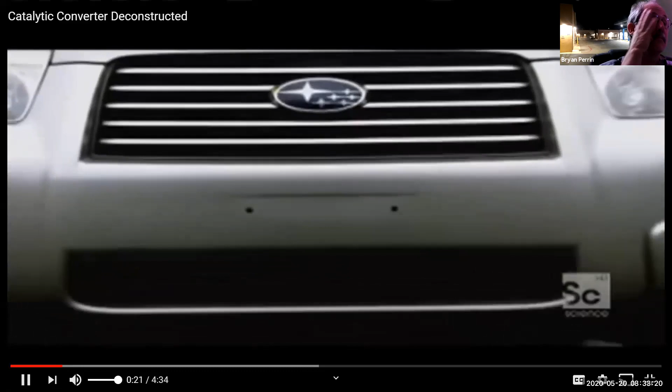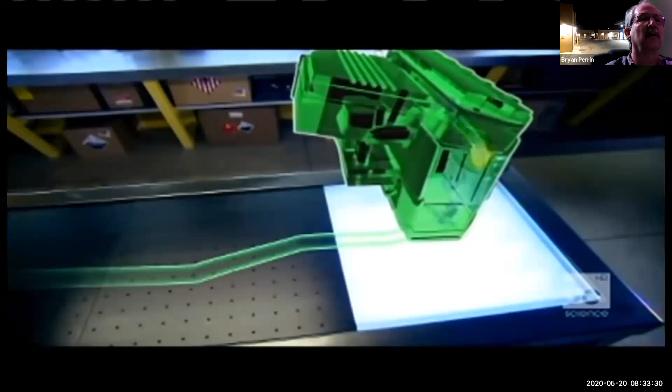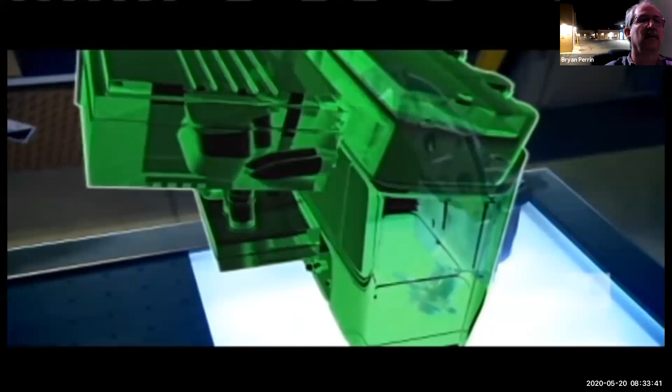Take it apart so you don't have to. A multitude of cars. In each one, a motor burns fuel, producing oxides, carbon monoxide, and unburnt fuel residue. Luckily, each car also has a catalytic converter, located under the hood, attached to the motor, right before the exhaust system. Gases produced by the motor go straight into the catalytic converter and come out the other side less than a tenth of a second later. The converter gets less than a tenth of a second to recombine toxic gas molecules and produce harmless substances like water vapor and nitrogen. How? To understand it, we've got to destroy it.

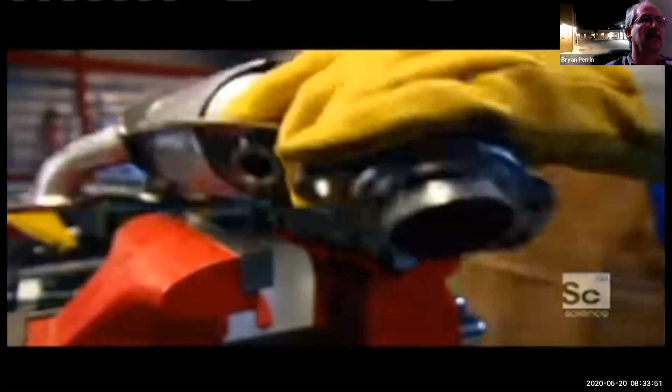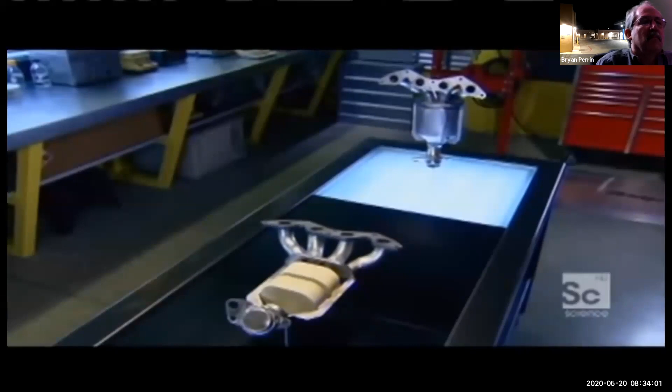The stainless steel housing contains two ceramic blocks. Each block is filled with thousands of...

Okay, those blocks are also called biscuits. And one of the things they're not showing you here is there's a blanket that wraps around the biscuits, that goes between the biscuits and the stainless steel shell of the catalytic converter, because these are made out of ceramic. So they're going to expand and contract at different rates than the stainless steel shell does. So when a converter rattles, it's because that blanket has been compromised, or this has been melted down, so it's undersized. That's also why when we replace catalytic converters, we actually have to perform a break-in procedure on them.

Where we actually get the catalytic converter hot, which causes that blanket material to do what's called a pop. And what it does is it pops to firmly hold the biscuit in place. Failure to do that will actually cause a catalytic converter to prematurely fail.

Not as much of a problem here on the West Coast where it's fairly warm, but back east or where it snows, an exhaust shop might put a catalytic converter on a car and just park it. Customer drives it home a couple miles, never really gets hot. By the time spring comes around and it starts getting hot, it's too late - the thing's already undersized, it's been moving around, the converter's junk. So there is actually a break-in procedure when you replace a cat, but I want to point those out.

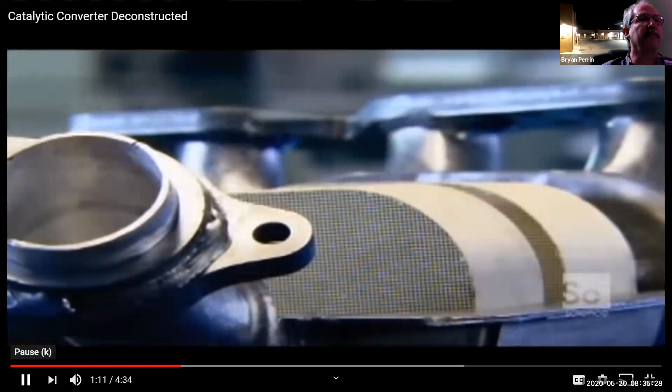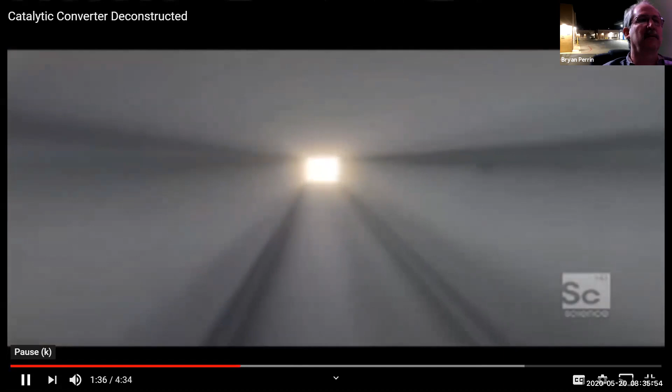...of microducts. Their sides are coated with precious metals - platinum and rhodium in the first block, platinum and palladium in the second block. Metals that can cost more than $100,000 a pound, but they're worth every penny. Together, they have the extraordinary property of causing toxic gases to react and then recombine, producing gases that are harmless to your health, all that without altering themselves or rusting.

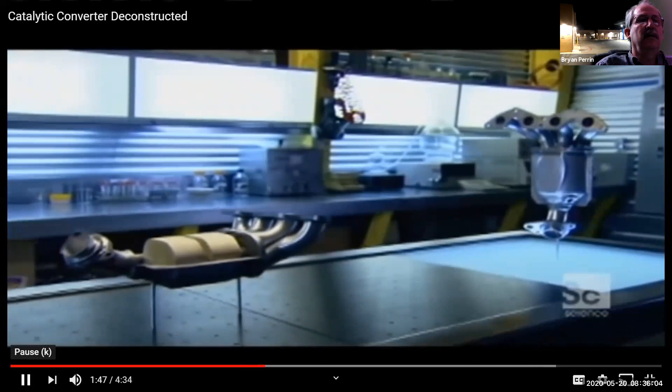Precious. The trick is to maximize the contact zone between gas and metals. That's why there are so many microducts, almost 400 per square inch. Their combined surface area matches that of a football field - a laboratory as big as a football field, but folded onto itself in order to remain small.

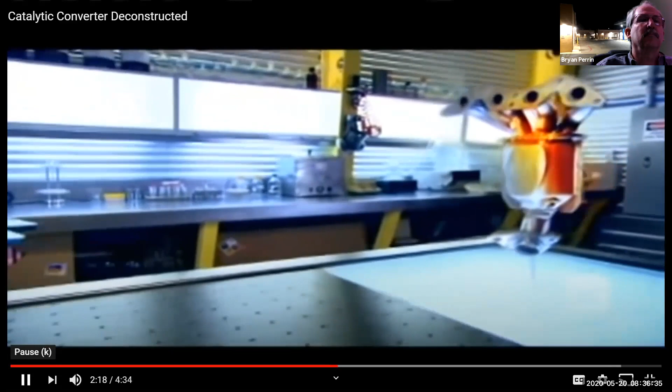The transformation of gas from toxic to non-toxic happens most efficiently when the catalytic converter is hot. Very hot - 1,300 degrees Fahrenheit. It's the toxic gases themselves that heat up the catalytic converter.

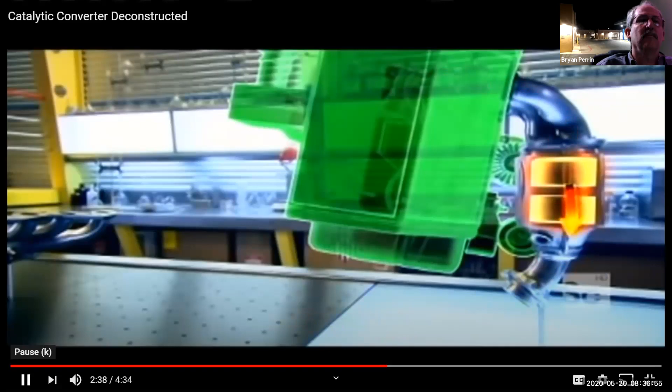Exhaust gases exit the motor at temperatures as high as 900 degrees Fahrenheit. The chemical reactions inside the catalytic converter also generate heat, transforming the converter into a super efficient furnace designed to break down and reform gas molecules. Let's take a closer look at these mysterious transformations.

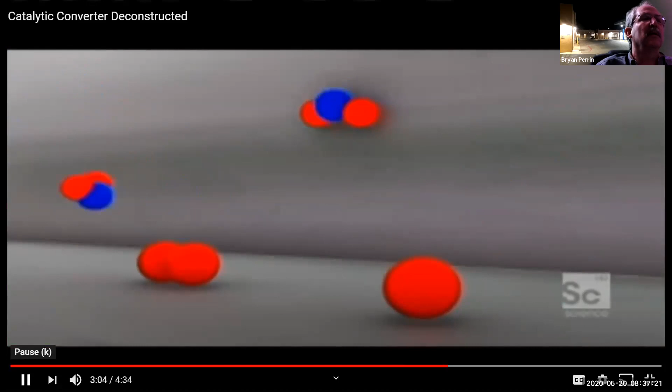The nitrogen oxide and carbon monoxide molecules, along with molecules of unburnt fuel residue, enter the catalytic converter. They're swallowed up by thousands of microducts. As they reach the platinum and rhodium in the first block, nitrogen oxide molecules are the first to react. These metals break down the molecules by withholding one of their atoms. The freed atoms stick to each other and recombine. The result: nitrogen oxide molecules become oxygen and nitrogen, which already make up 99% of the air that we breathe.

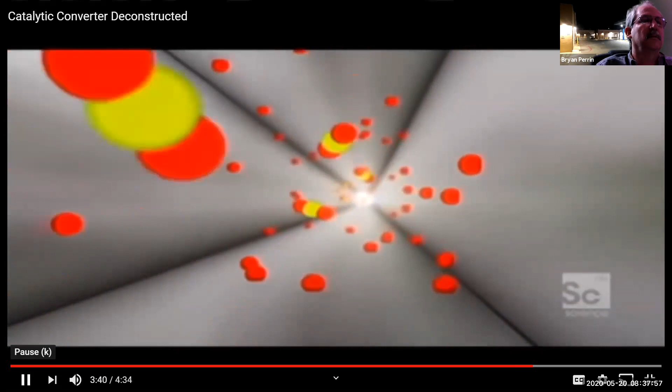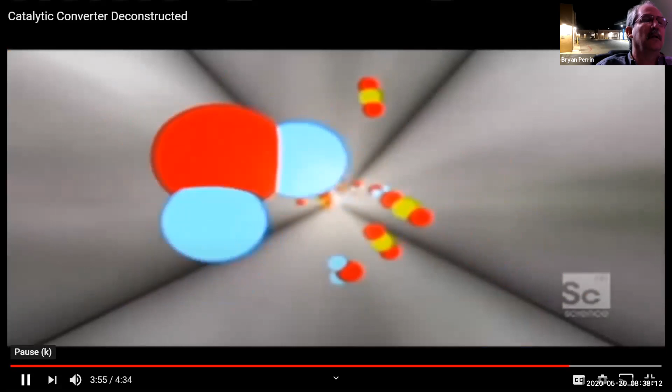The gas molecules now head into the second block, where the microducts are coated in platinum and palladium. These precious metals withhold oxygen. The intense heat here forces the carbon monoxide molecules to combine with the oxygen. The result: carbon dioxide, the same gas that creates bubbles in soft drinks. Now for the molecules of unburnt fuel residue: at these extreme temperatures, their encounter with the oxygen forces them to recombine. The result: more carbon dioxide and water. All that in less than 1/10 of a second.

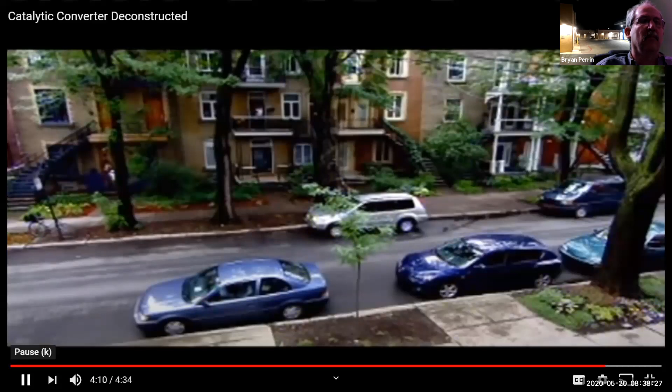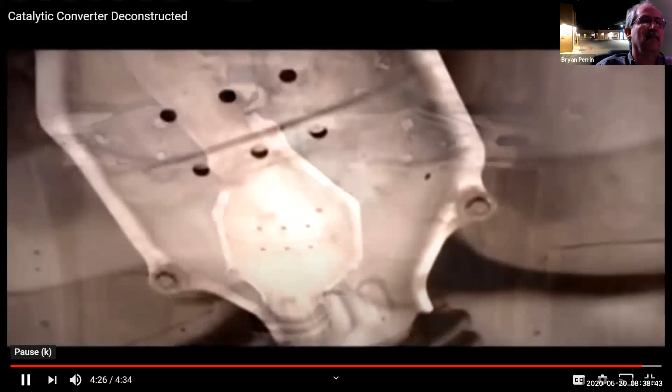In theory, the catalytic converter can eliminate 99% of a motor's toxic gases. In reality, it's inefficient as long as it's not hot. A car has to travel about 6 miles before the catalytic converter reaches its ideal operating temperature - that's 6 miles spewing untreated gases. In spite of the catalytic converter's best efforts, the car remains a source of pollution. But thanks to this miniature laboratory, it emits 5 times less pollution. That's still pretty impressive.

Okay, what did you guys think of that? Super cool, very informative. Yeah, I like that. I like a lot of the stuff in it, and a lot of it is more in the 90%.

You mean of being accurate? You mean any people with gas cars, they need to get smogged every 6 years? What about every 6 years? You gotta get your car smogged. Not every 6 years - once it's more than 8 years old, if it's powered by gasoline, it's every other year. Or every other year, like the 90s? Biannual inspection, so we do it every other year for the purpose of smog. We used to have a 6-year rolling exemption, so if I had a brand new car and I hadn't sold it, I didn't have to smog it for the first 6 years. Now it's the first 8 years. If I sell it, and it's less than 4 years old, I don't have to have it smogged, but if it's more than 4 years old and I sell it, I have to get it smogged. But I thought it wants you to smog every 3 years, isn't it? I thought the DMV wants you to get your car smogged every 3 years if it's like 10 years older. It's every other year. Every other year? Biannual. So that means if it's like my 2012 has to be smogged in 2020, 2022, 2024, and so on. My 05 has to be smogged in 17, 19, 21, and so on. So my 3 cars that are odd years - my 87, my 95, and my 05 - all have to be smogged the same year. And then my Camry is a 12, so it gets smogged in an even year.

So one big thing they're missing in the catalytic converter video is cerium. Cerium is a rare earth element that is used to store and release oxygen. Normally we're using about Ce5, Ce6 - there's 5 or 6 cerium atoms stuck together. So we use cerium to store and release oxygen. The significance of that is twofold: first, cerium is the material that melts at the lowest temperature - it melts at 1462 degrees - so it's the first material in the catalytic converter to go away.

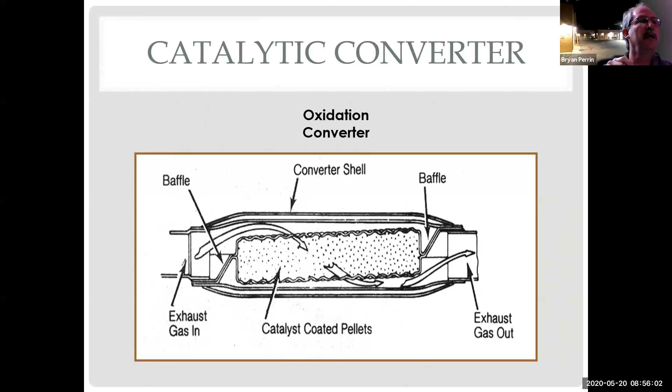So this is a traditional oxidation converter. These were pellet types, and they were restrictive. The plug you see at the bottom right was originally designed so you could take it off, pull the plug out, and put more pellets in. No one ever did it, but all the GM dealers got the factory tool to do it with, along with a bag of pellets. But these are restrictive because it's much more like filtering through sand—I'm pushing the exhaust through this pile of pellets, and the air has to find its way to weave through. These were very efficient because something couldn't go directly through and never touch anything, so it had a good catalytic reaction.

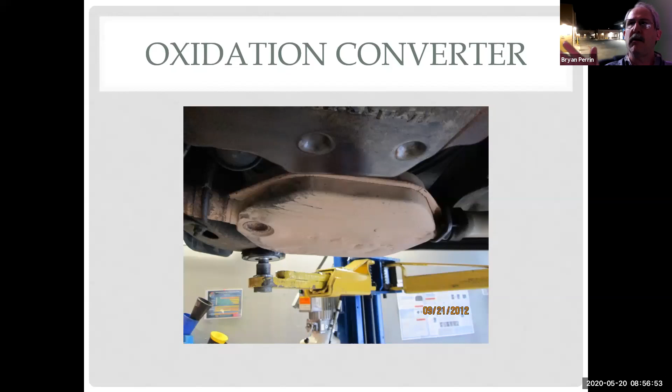Now, these catalytic converters only have platinum and palladium in them because all they do is oxidize. So they do nothing for NOx—they strictly oxidize HC and CO. The internal temperature of a catalytic converter, in order to work properly, is 600 degrees. Once it's hit 600 degrees, it can start working.

Wait, isn't it 1200 to be efficient? No, 600 is where they start working. Below 600 they're pretty inefficient. The hotter the catalytic converter gets, the more efficient it becomes.

But in the video he said 1300. He said the gases from the engine by itself are 900 Fahrenheit, and then the chemical reaction heats it up to 1300. Let's think about this for a second. I know the article also says 1300, so you put what the article says in it.

But at 1300 degrees—and that was true on oxidation cats because we'd pump air into them and get them really, really hot, hot enough that you weren't allowed to idle the car more than 5 minutes or the carpet would catch on fire.

But would we design something to work at 1300 degrees normally, and at 1462 degrees, only 10% more, we're going to do catastrophic damage and have to throw the part away? No, that's not smart. It just doesn't pass the smell test.

I do know the internal function of the cat from all the research stuff I've read on cats. They need 600 degrees Fahrenheit to start working. As they oxidize, they generate more heat.

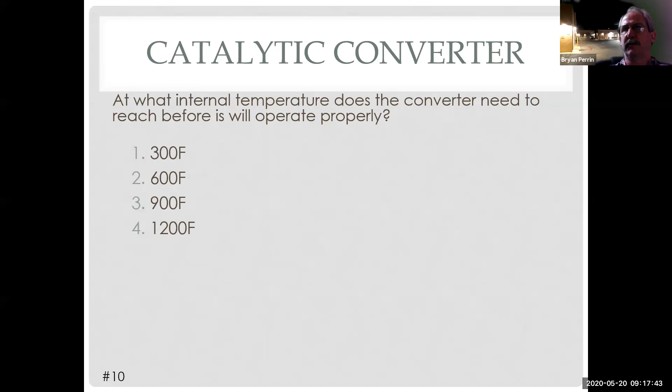Apparently the video, and that was the Science Channel, I mean that's a big budget production. They didn't get the memo.

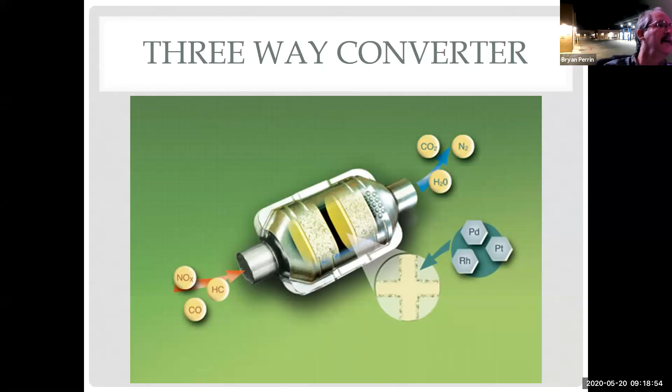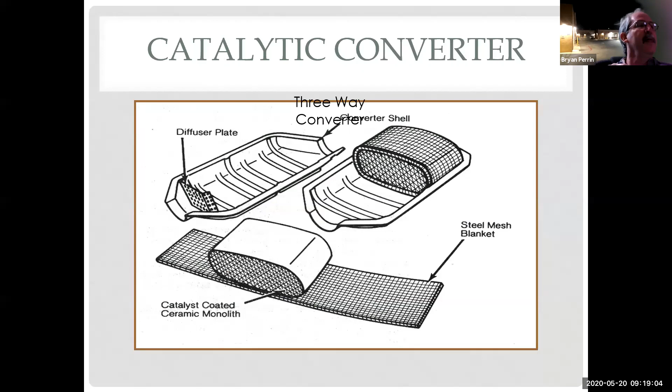So this is a nice picture. I put this in here because it shows the blanket that goes around the biscuit, or ceramic monolith is its technical term. And that's what pops when we break in the CAT.

What component is required to be present on a vehicle for a 3-way converter to operate properly? And the correct answer is oxygen sensor. The reason why is because I have to be able to go rich, I have to be able to go lean, I have to be able to go rich, and I have to do that at a certain frequency in order for my catalytic converter to work. Rich, I can reduce NOx. Lean, I can oxidize HC and CO. Rich, I can reduce NOx. Lean, I can oxidize HC and CO.

And again, if that gas is going through the CAT in 100 milliseconds, I really need that O2 sensor to be switching at least every 100 milliseconds or so, right? So that I'm not overwhelming the cerium.

What the cerium does is allow it to hold oxygen when I'm lean and release oxygen when I'm rich. So the cerium is what allows, when the car is rich, I can still oxidize because the cerium is going to release oxygen. When I come down lean, I can still reduce some NOx because the cerium is going to grab oxygen. The chemical reaction with cerium to oxygen is much faster than the chemical reaction with rhodium to oxygen. However, rhodium is much stronger than cerium, so rhodium is strong enough to break the bond with the nitrogen atom and separate oxygen and nitrogen. Cerium's not, cerium's just out there grabbing the free stuff. But because the reaction with cerium is so much faster, it's able to grab that free oxygen before big dumb rhodium can grab it, which leaves rhodium the only choice to get its oxygen from the nitrogen atom. And that's why if a car's running lean, it can reduce NOx.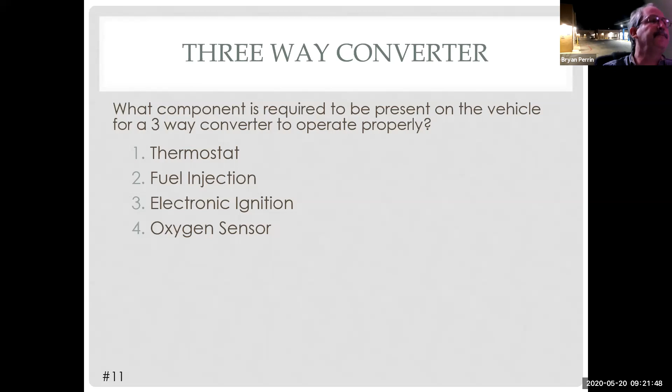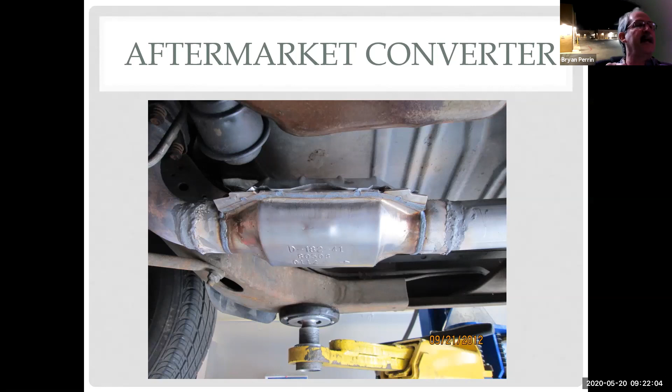So here's an aftermarket converter. When I'm doing a visual inspection for a smog check, I would see this aftermarket converter underneath, and I would have to go in and get the numbers off that converter and ID it. The soldering - yeah, here's another one. See how nice and easy that is to read?

Why do we study the composition inside? Because if I don't understand the composition inside, I can't understand how to test it and how to replace it properly. So the chemistry inside the cat is highly important. If you notice, I don't spend a lot of time inside a lot of things.

But the only way to test is like the result of the smog on the other side, right? No, absolutely not. There's several different ways I can test a cat. On an OBD2 vehicle, I'm not going to measure the smog coming out the other side at all because it's not going to tell me. If I drilled holes in front of it and behind it, it still wouldn't tell me accurately. That's called an invasive test, and it's horrible and doesn't work well.

So on an OBD2 vehicle, I can test it with the O2 sensors - the quantity of oxygen there on the other side. Well, yes and no, it depends on how the catalytic converter is being tested. There's two different ways we test cats. One is what's called switch ratio testing, where I monitor the front O2 sensor and I monitor the rear O2 sensor. If the front O2 sensor is doing this and the rear one is doing this, we're assuming that we have some cat function.

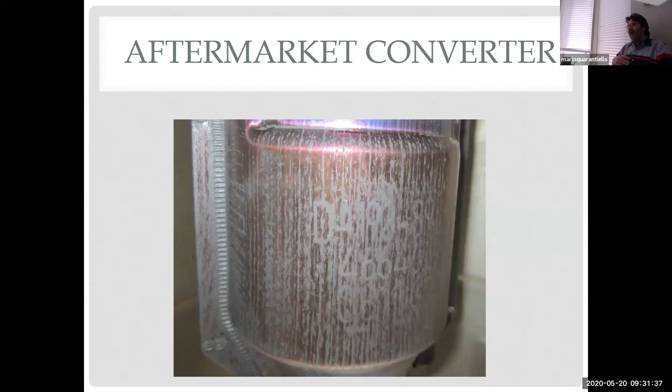So is this a factory or aftermarket cat? Aftermarket. Aftermarket, which means what? I need to go get numbers on it.

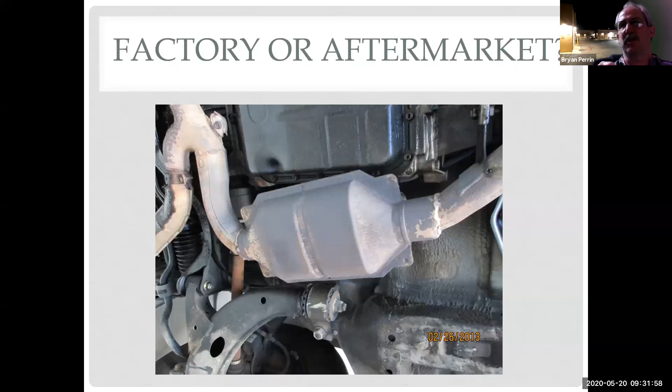Here is an aftermarket cat, we can see the numbers on it. I can see the executive order number and the part number, and I'd have to look at the next thing to see the manufacture date.

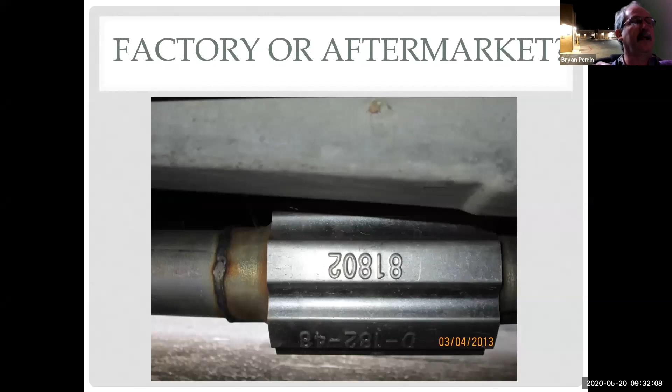On these early systems with air injection going into the cat, it was real easy for these catalytic converters to overheat. We were told not to let these cars idle for more than about 5 minutes. At least once a month, we'd get a car pull in off the freeway with the carpet on fire because the catalytic converter overheated, because the car would be running rich, and with all that air going in, now we have a blast furnace. It would overheat, get past the heat shield, and cause the carpet to catch fire.

We used to get about once a month in the service station cars pulling in off the freeway, literally with the carpet smoldering or small flames. Very, very common back in the day. This is also where, if you park on grass, you're going to start a fire. It goes back to this system.

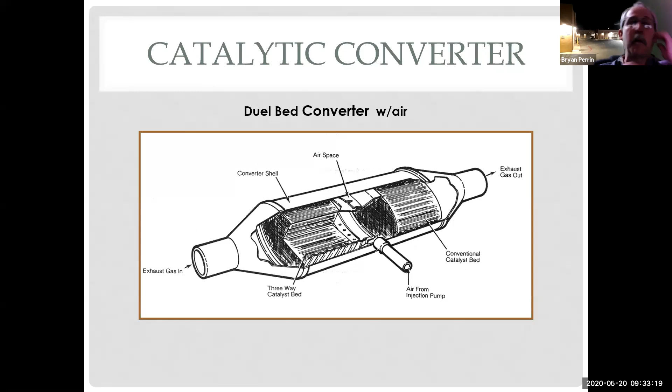What emission does an oxidation converter use to help control? NOx? No, it oxidizes everything except NOx. What do I oxidize? CO and hydrocarbons. Hydrocarbons and carbon monoxide, that's what we oxidize. So this is what we have on the oxidation side.

Oh, I'm sorry, I misplaced my chat. It was hiding behind all your pictures. Looks like I got the video. Okay, I hardly hear the video. I think I got that.

Smog, okay, I just want to make sure. What's the difference between California and federal cat? Great question. The biggest issue is how's the cat certified. That's it, how did they certify it when they got it done?

So a California cat may have a different load to it. In aftermarket, California converters have a higher load, more precious metal in them. Also, they've had to go through the testing process with the California Air Resources Board. Federal catalytic converters, we just made a cat, here's the part number, please buy. But we cannot install them in California if they're not California approved, correct? Yep.

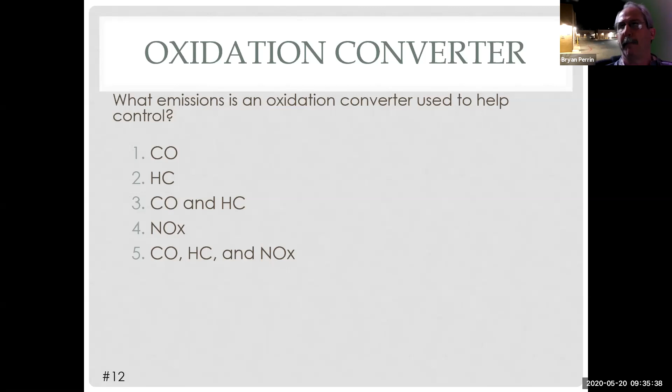So here's a warm-up three-way cat. Keep in mind, this is still a three-way cat. It's called a warm-up three-way cat because it's mounted right against the engine or right against the exhaust manifold.

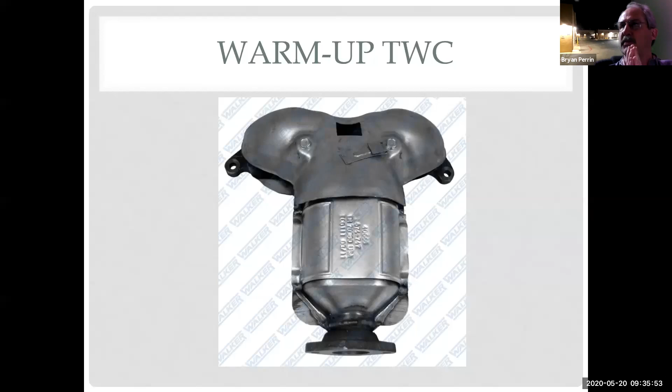What emissions is a three-way converter used to help control? CO, HC, and NOx, all of them. Got it, all the above. So the two things you need to remember: oxidation, we oxidize HC and CO, we turn it into H2O and CO2, we're adding oxygen. Three-way cat does everything. Reduction cat is NOx, we reduce NOx, we break it into oxygen and nitrogen. Another thing is we use rhodium to reduce NOx. R&R, rhodium reduces. Platinum and palladium are used to oxidize HC and CO.

So that's kind of how I remembered the elements and what's going on inside there.

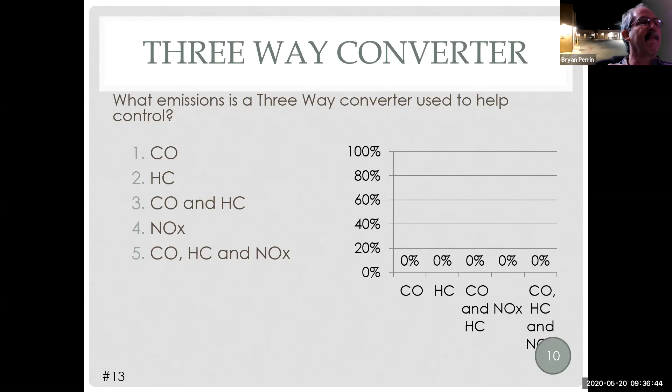So here's a heat shield right here. Kind of shows the location. If we're replacing a catalytic converter, I have to install the converter in the same place. I can't move the converter, I can't add pipes, I can't move O2 sensors. There's a lot of limits on that, and I should put that into our resources.

That's on the CARB website, and I should move that over into our shell. I didn't think about that, and I'm gonna. I have the heat shield, the protection for the heat. The heat shield's protection from heat. We see we have it underneath to kind of protect the grass and things like that, and we have them underneath the carpet, underneath the floorboard to help keep heat out of the driver's compartment.

And we do that for a couple reasons. One is if I put a lot of heat in the driver compartment, that means I'm gonna have to run the air conditioning more in order to cool the car. So now I'm wasting energy. So the heat shield, we're using it to try to save energy a little bit. We're also using it for protection. So multiple reasons.

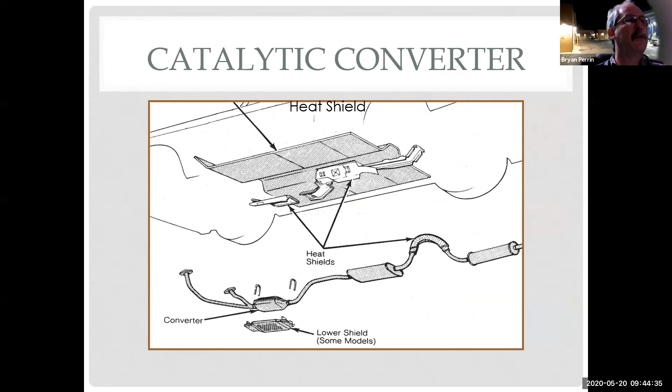Pretty interesting. Okay, so now let's look at diesel emissions a little bit. I want to finish this up today. Oh, it's already 10. Come on. All right.

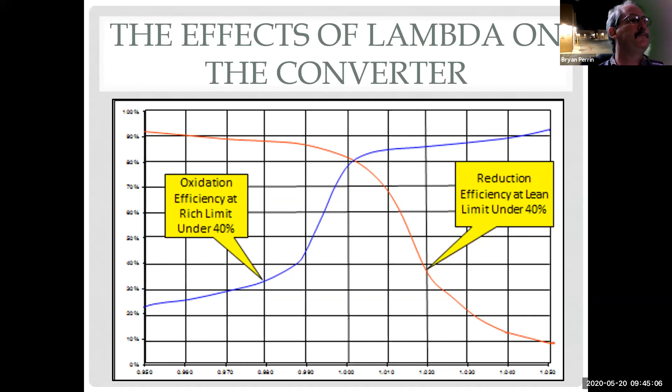Okay, so diesel emissions. We could spend a week on diesel emissions, but I want to give you at least an overview here and why we have them.

I like this slide because it shows the big regulation years: 1994, 98, 2002, 2007, 2010. This is when the regulations went into effect, telling the diesel industry to clean up its act. What's interesting is the regulations for 2010 were made before 1998—the industry was told how clean it needed to be and how long it had to get there, but there was no technology available at that time to get a diesel to run that clean.

We traditionally do this with vehicles: we legislate standards where the technology isn't yet available, then task manufacturers to develop the technology to meet those standards. That's also why some of that technology doesn't always work so good the first year or two, because it's brand new—it's just been invented.

The other interesting thing is that all these emissions are measured per horsepower. So two things have happened with diesels from '94 to 2010, and we see it continue today: diesels, besides running cleaner, produce a lot more horsepower. They produce more horsepower because if I make more horsepower, I don't have to be as clean. Are you following the logic? If I make 100 horsepower, I'm only allowed to put out so much emissions. But if I make 200 horsepower, I can put out twice as much and still be legal. Kind of a neat trick, isn't it?

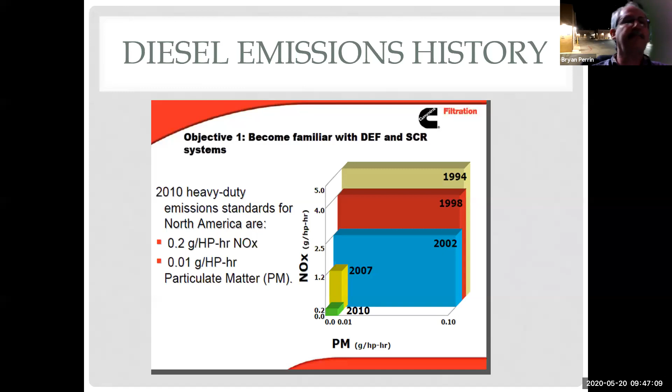So for 2007 and older, we see the diesel oxidation converter and diesel particulate filter. From 2010 to 2013, we saw the selective catalytic reduction come in, the SCR, which uses AdBlue or DEF fluid—diesel exhaust fluid—or AdBlue if I'm working on a European car.

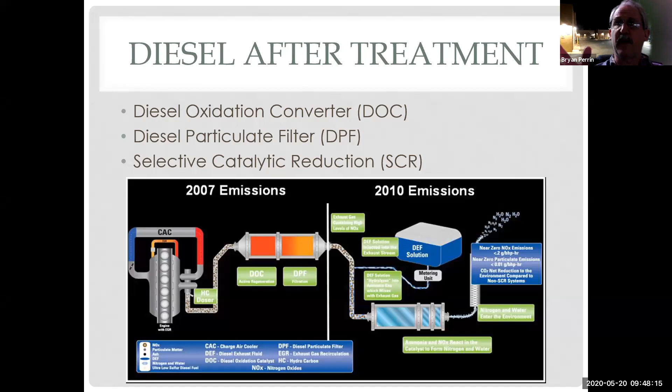We actually use the AdBlue as the catalyst in this process. The SCR is essentially a frying pan, and we add the DEF solution as our catalyst. That's why customers have to buy the DEF fluid and put it in. Inside our SCR, all it has is steel and copper—sounds like a Revereware frying pan to me. It should never wear out because it's just a frying pan.

Diesel exhaust systems can look a lot different. I do have oxygen sensors here, but look at my diesel oxidation converter up front. Then I have a NOx storage converter, and an H2S converter, which is for sulfur. What is that? 2 hydrogens, so it's sulfur dihydride, I think, or sulfur—been a long time since I was in chemistry, but you get the idea. The S means sulfur. You had a question, Humberto?

Yes, I do—who is watching the AdBlue level in this system? Who is watching which levels, the emission levels or the AdBlue? Let me get to the SCR and we'll talk about that. Okay.

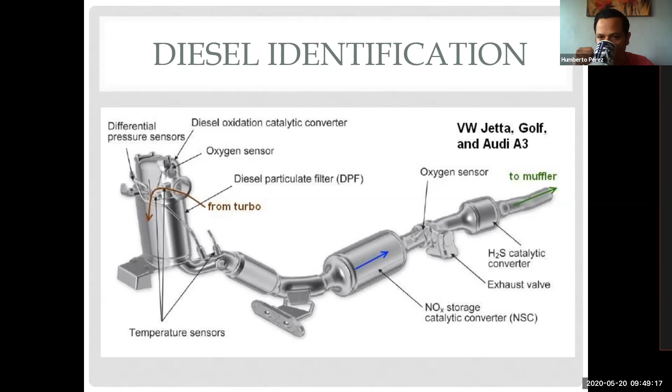And there's a picture here out of ALLDATA that shows me where all the pieces are. So if I've never smogged one of these before, you can see the underhood label. It's all Greek to me. Let me go get a picture. I'm not the sharpest guy, but I guarantee you, if you give me the truck and you give me the picture, I can look underneath there and see if all that looks the same. I bet you guys can do that too. So a lot of this is not knowing everything by heart, it's knowing where to find the information so I don't make bad decisions.

The biggest enemy we have as a smog tech is being lazy. I'm sure it's okay, I'm not going to look underneath the car, it looks like it's fine. I'm not going to go look it up in the book, I'm sure it's all there. When I smog a car, every car fails until it proves everything is correct, and then I'll pass it. Where people get in trouble is when they start doing a smog and go, I'm sure everything's fine unless I find something wrong. That's going to make you sloppy, it's going to make you cut corners. Every car I smog fails until that car proves every piece is there that's supposed to be there. And that's why I don't make that mistake.

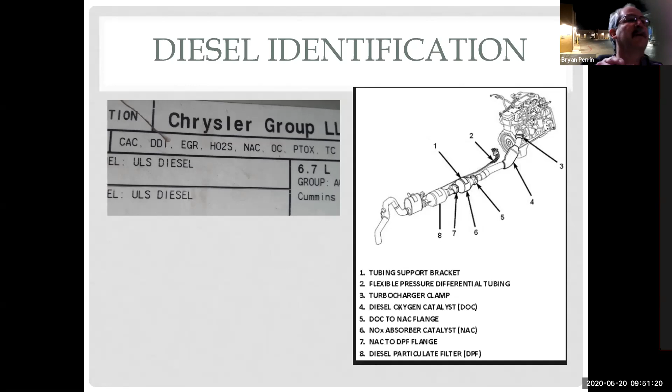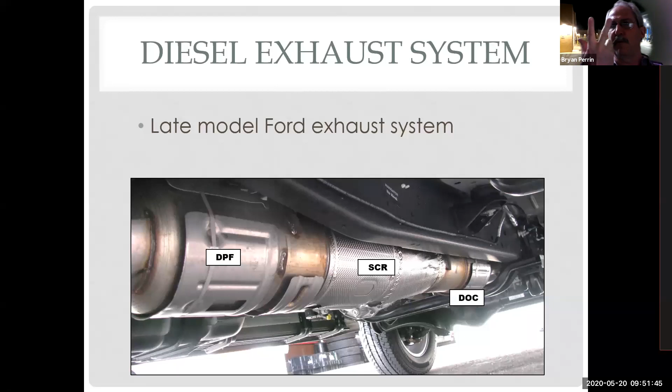So here is a Ford exhaust system. And you see this looks a lot different than our gasoline converters, doesn't it? These are huge, and a lot of times they're all one piece from the factory, replaced as one piece. And we can see I have my diesel oxidation converter first, which is always the first part, my selective catalytic reduction second, and my DPF third. Depending on the weight of the vehicle, the DPF and the SCR can be reversed, depending on the weight class of the vehicle and the manufacturer. So my diesel oxidation converter is just that, it's an oxidation converter.

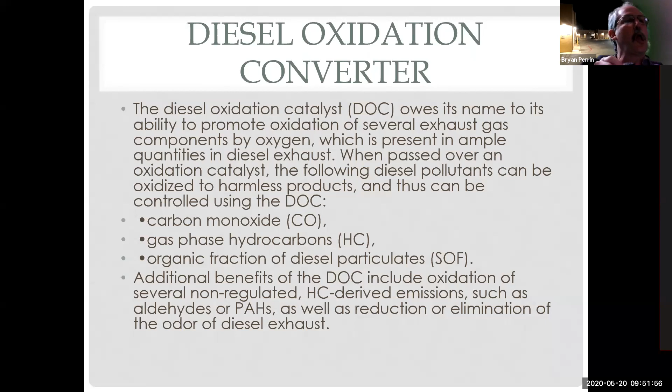And I have an exploded view. Does the honeycomb look familiar? We're going to oxidize HC and CO. NOx is still going right through because NOx doesn't care about oxidation, it already has enough. And so you can see the chemical reactions here on the DOC.

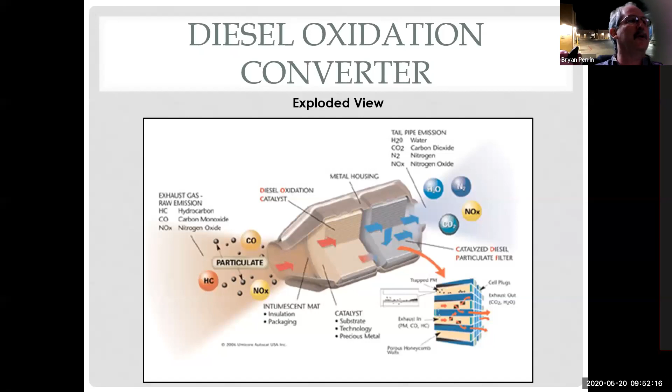Diesel particulate filter, we have two types: open and closed. What we use on light duty vehicles is a closed type, which gives a much higher efficiency. Unlike our gasoline, an open type would be like our gasoline converter, I got a honeycomb and I can see through it. What they do on a closed type is I go down through this channel and it stops. Now I have to go through the material in order to get to a channel that's open at the other end. So every other channel, one's open at this end, the other channel is open at the other end. It has to go through the material.

It's a filter. One of the primary purposes of this filter is to prevent smoke. So if you have a newer diesel that's smoking, either the diesel particulate filter is bad or missing, because it's going through the filter media. It can't go through the filter media because of the micron size of the smoke. Therefore, the filter has either been punched out or it's missing altogether on a vehicle that's smoking, on newer diesels.

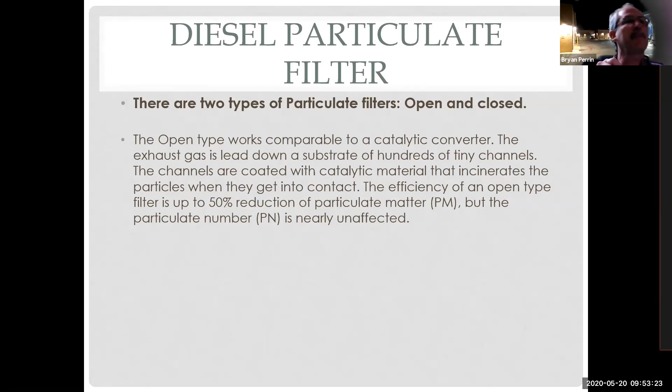And it talks about this, and it has some pre-selection filter in it. Here's a picture of one right here. These are measured for pressure, so they may have a pressure sensor front and back. They may also have a NOx sensor front and back. There's a couple different ways they measure these. When these get full, the vehicle will do what's called a regen, where it gets this up to over 1,000 degrees and melts the carbon, it burns it and turns it into ash. Once this thing's full of ash, it's done. Once it's done, we have a couple choices. There are shops that'll bake these in an oven to get all the ash out of them, or you're buying a new one.

When you go to heavy duty stuff, these are held together with bolts and nuts, and you actually unbolt them, take the filter out, and send it to be cooked in an oven. So if I'm running a tree trimming truck, or a city truck that's spending a lot of time at high idle, 1,800 RPM and not going anywhere, or just low idle, a lot of sitting around, I might plug this up in a month.

If I'm driving it, going down the road, acting normally, it'll do its regen. I'm good for a couple 100,000 miles. So it really depends on how I drive the car. If I'm using my truck for a lot more towing, I'm going to fill this up sooner. If I put a tuner in my truck, I'm going to fill this up sooner.

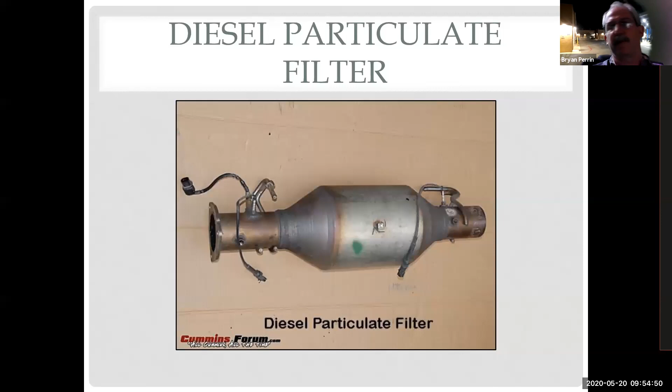Maybe that's some of the money coming out of our taxes with the city. They're idling too much. Yeah, but they got to idle. A lot of it's to run their computers. That's why police cars have to stay running—their battery system isn't enough to get the car started with all the computer and electronics they've got running. And true, the air conditioning too, if it's a canine unit.

That's true, and diesels, from what I read, tend to idle for a minute even when you turn them off. Diesels are neat because I can actually idle a diesel very efficiently, much more efficiently than a gas engine, because gas engines always have to work pretty close to stoichiometric. Diesels, I can idle them as lean as 100 to 1.

Would you say that most places that decide to bake them and get the soot out would pay for that rather than just getting a new one? I mean, is it? Oh, absolutely, absolutely, and that's big business.

From what I hear, there's a shop in East County, I think it's El Cajon or Santee, somewhere out there, that does this for the local diesel population, because I asked them when I was teaching the 6-7 class. I know up in the LA basin there's a couple shops. Even up in Bakersfield there's a shop that does it. There has to be enough of a population for a shop to have an oven and do all that stuff. But it's normally a shop whose whole job is just baking these things. They may not even work on vehicles, or if they do, all they do is take these on and off to bake them. A lot of it is sublet work from other shops, where other shops take them off, bring them in, and they're there all day just baking these things. Some of them actually have pickup and delivery, just like a machine shop or a parts store.

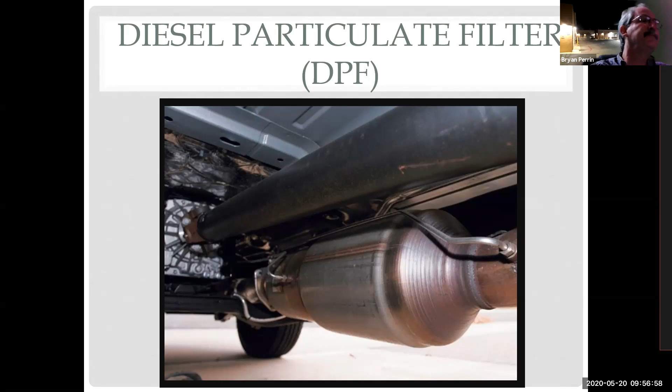And I do have a little video on diesel here that I'm going to play. I've got to find a new one, because this one, even though it's paid for by our tax dollars, doesn't have closed captioning. So I'm going to use it this time, but I've got to find one with closed captioning.

Quality specialist with Washoe County Air Quality Management Division: This is a short educational video about particulate matter, what it is, why we're concerned about it, and where it comes from. So what exactly is particulate matter? It's a pollutant found in the air that includes dust, dirt, soot, smoke, and liquid droplets. Particulate matter, also known as PM, is a year-round pollutant, but is of greater concern, especially in our region, during the winter months, due to temperature inversions like the one shown in this photo.

Well, great, I think I screwed it up now.

You notice how they said the problem they have is in the wintertime due to temperature inversion. In the LA basin, it's the summertime due to temperature inversion. So a lot of our mountain communities built in valleys have smog in the winter, none in the summer. In the LA basin, we tend to have it here. It's interesting how that cycles. That's also why we don't have the same smog problems in places like Chicago, Cincinnati, or New York—because they're not in a basin, it's all flat, they can't create that inversion layer to create the smog. That's why we don't have smog programs in some of these big cities, but their cars are still polluting like nobody's business, and no one checks, because they don't have a program, because they're meeting clean air standards, because the smog they make in Chicago is blowing east to Pennsylvania and out over the Atlantic.

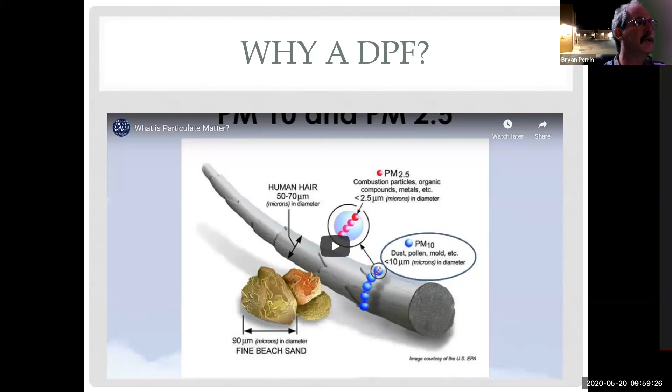Hello, my name is Janine Wright. I'm an air quality specialist with Washoe County Air Quality Management Division. This is a short educational video about particulate matter, what it is, why we're concerned about it, and where it comes from.

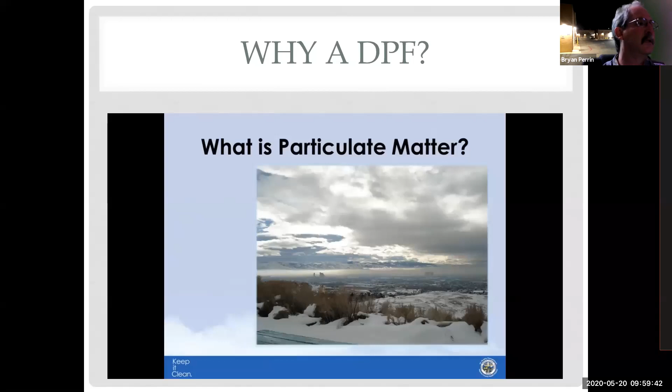So what exactly is particulate matter? It's a pollutant found in the air that includes dust, dirt, soot, smoke, and liquid droplets. Particulate matter, also known as PM, is a year-round pollutant, but is of greater concern

Oh, this thing is just not happy.

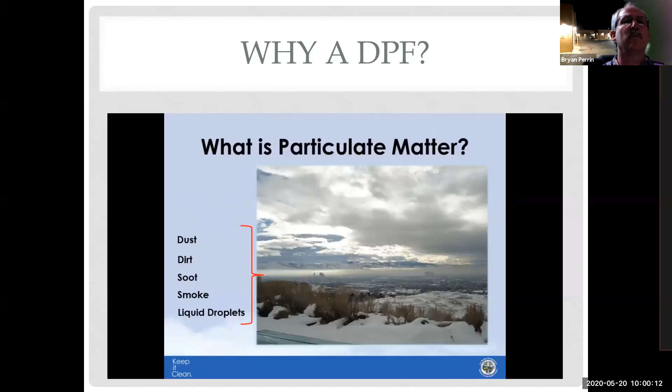especially in our region during the winter months, due to temperature inversions like the one shown in this photo. During these inversions, pollutants can be trapped for several days at a time, basically until the weather changes and the inversion breaks and the wind blows it out of the valley.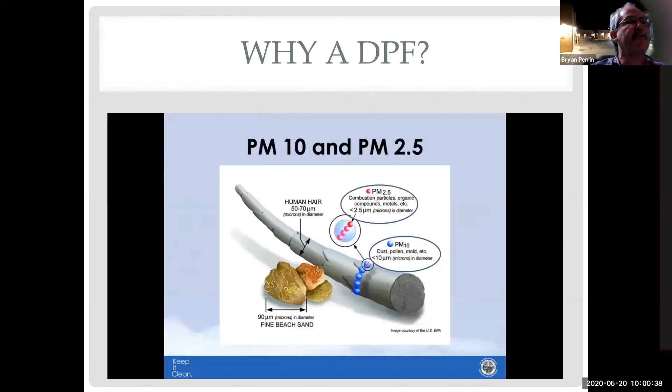There are two sizes of particulate matter that are regulated by the EPA. Particles between 2.5 and 10 microns are called coarse particulates, or PM10. These are of concern to human health as they are small enough to be inhaled and accumulate in the respiratory system. Particles of 2.5 microns or less are referred to as PM2.5 or fine particulates, and are a greater health risk than PM10 as they can reach deeper into the lungs.

So how does particulate matter affect my health? Children are especially susceptible to the effects of particulate matter as their respiratory systems are still developing. The elderly and adults with chronic heart or lung diseases are also more likely to experience the effects. However, healthy adults can also feel these effects from particulate matter.

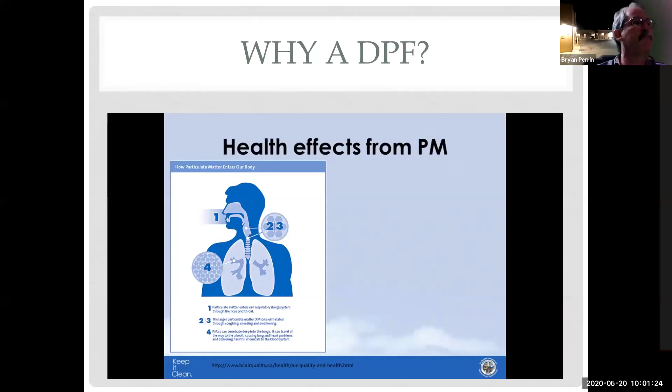Fine particulates, as I mentioned before, can get deeper into the lungs and cause serious health problems such as decreased lung function, aggravated asthma, development of respiratory disease in children, irregular heartbeat, non-fatal heart attacks, premature death in people with heart or lung disease, increased susceptibility to heart and vascular disease for postmenopausal women, and increased risk of lung cancer.

So where does particulate matter come from? PM10 or coarse particles come from crushing or grinding operations and dust from construction or unpaved roads. Fine particulates come from combustion activities, including wildfires, power plants, some industrial processes, motor vehicles, and wood burning, such as in your fireplace or wood stove.

Our burn code is in place to help reduce the wood smoke in the Truckee Meadows, as this accounts for nearly half of all the PM 2.5 during the winter months. For more information about particulate matter, visit us at ourcleanair.com.

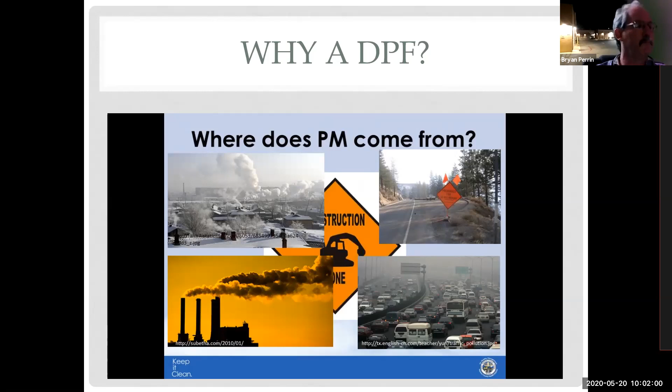So I thought that did a nice job of kind of showing the particulate matter, also showing that the small particulates are really the most dangerous, and the Bureau training does that also. I'm sorry I couldn't get the volume up any higher. I saw someone message me. That's why I kept pausing. I kept trying to change things.

And the inspector update training also talks about particulate matter and the health effects from it. So that's why we have a lot of the stuff we put on diesels. We are really concerned about particulate. That's the new thing we're really focusing on over the last 15 years.

And it's really dangerous because that 2.5 gets in the lungs and we can't get it out of the lung. It creates permanent damage. So that adversely affects communities that live close to industrial areas, close to freeways, close to where trucks might be traveling. And we see those health effects disproportionately affecting people that live in those areas.

Consequently, people that live in those areas tend to have less income than people that are living in other areas because trucks aren't coming down my road, right? But if I lived in San Diego, if I lived over about one of the main roads down there, Logan, 30th, any of that stuff, if I lived right by the 805 or the 15, trucks would be coming by all the time. I would be breathing a lot more of that PM 2.5. And that's why we're going after that, is because of the severe health effects that causes.